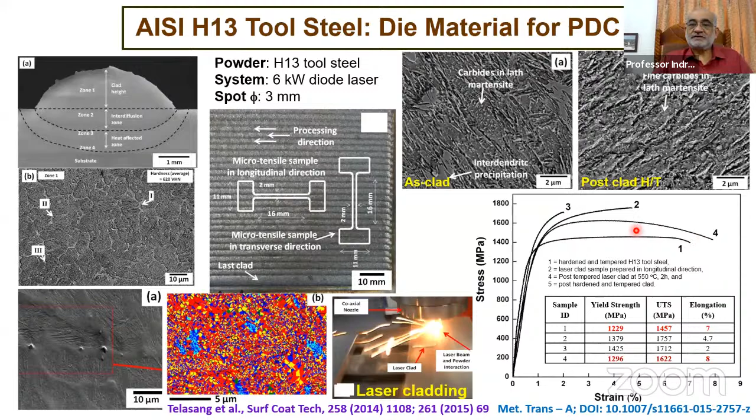Instead, we actually have more volume fraction of martensite than the original component. Why is it so? You are solidifying steel from molten state all the way to room temperature, and during that, because of high hardenability, the steel not only solidifies into austenite but also undergoes austenite to martensitic transformation during the same continuous cooling process. Since the lath size is finer than what could happen in bulk, because it's happening only within 1 or 2 millimeters with very fast self-quenching, the platelet size is much smaller.

As a result, we get not only higher strength but also higher plastic region. So one reason we are interested in additive manufacturing is purely because if you do subtractive, you create so much waste. If you do additive, practically no waste. There is enormous advantage in terms of design flexibility, precision, accuracy, practically very little tooling required, no further machining. This is a fairly green and clean manufacturing process, amenable to almost all kinds of materials. Ceramic is a suspect, not yet very popular, but metal and polymer for sure. It's ideal for high cost, low volume products.

But the most important thing is that an industry which 20 years ago was $1 billion, in 2018 itself was one order of magnitude higher, and now the projection is by 2025 the amount is going to be some 23 or 25 billion dollar market. So there's a huge market and expanding every day.

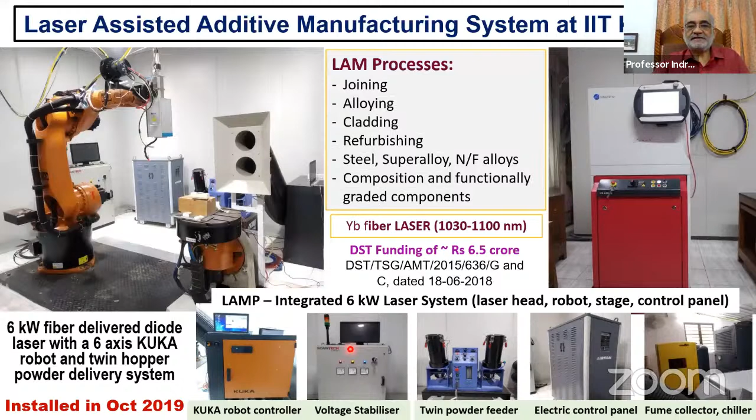Now, the confidence with which I'm speaking today that additive manufacturing, cladding, and eventually remanufacturing are all possible using laser as a tool emanates from the fact that in 2019 we established this laser processing laboratory at IIT Kharagpur: a 6 kilowatt fiber-delivered diode laser with a 6-axis KUKA robo arm and a powder delivery system. In this, we have been able to produce many results covering joining, alloying, cladding, refurbishing, and various other operations. I'm pretty sure a finished component is quite possible, though we don't have that level of competence as yet. But this is a complete laboratory which can do all kinds of material processing, except oxide ceramics, and produce either clads or three-dimensional products and a complete system as well.

We all know that laser is very interesting and attractive to us because of these reasons: coherence, monochromaticity, very low divergence, and most importantly, very high power density at exactly the spot where I want. In other words, we can produce the exact heating and cooling profile, thermal gradient, and solidification velocity, depending on where I place my focus.

This is an extremely fast process because for direct band gap, indirect band gap, or no band gap materials like metals, the excitation of electrons to a higher energy state and falling back to the ground state, while absorbing the incident photon energy and converting it into lattice heat, is possible only within less than a nanosecond, between nanosecond and picosecond timescales. So it's an extremely fast heating and cooling process.

Another advantage is that the heating profile is exponentially decaying, so the heating zone is confined only to the near-surface region, which could be just a few micrometers. Only two process parameters, power density and interaction time, allow you to achieve heating, solid state transformation, melting, vaporization, and in the process carry out all kinds of materials processing imaginable.

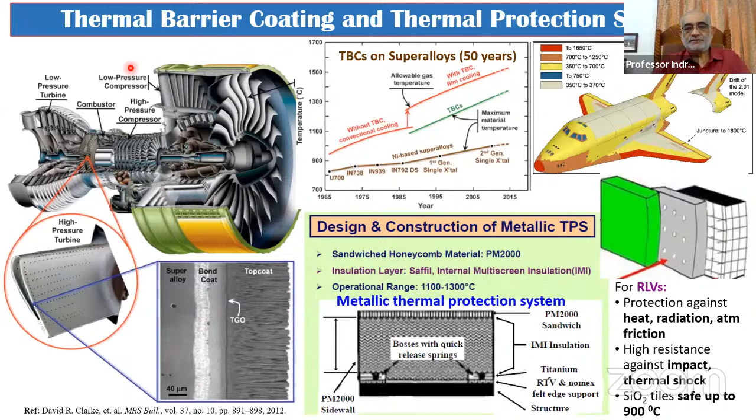Now onto specific examples. Manoj Kumar wanted to develop thermal barrier coatings and oxidation-resistant materials. Here's the first example, decades old, from Jyotsna's work during her PhD.

For the first time we showed that instead of an oxide barrier coating, if we could have silicides, an intermetallic phase much more compatible with the metallic base than oxides, making up 85% of the volume fraction, either as the primary phase or as part of the eutectic, then instead of the easy oxidation process in the base metal, titanium in this case, creating such a barrier layer prevents the counterionic transport of oxide coming from outside and cation going outside, so oxidation is prevented.

As a result, compared to how titanium normally oxidizes, these silicide layers reduce the oxidation rate significantly, even at fairly high temperatures. This is what we showed a long time back.

Subsequently, we repeated this with nimonic alloys and also dispersed borides and silicides in stainless steel, developing such composite structures. Borrowing from that, Manoj wanted to create these thermal barrier coatings.

The initial approach was thermal spray followed by laser melting, and we were able to produce a very nice structurally and functionally graded component, with the top layer being primarily oxide with certain controlled porosity to reduce thermal conductivity.

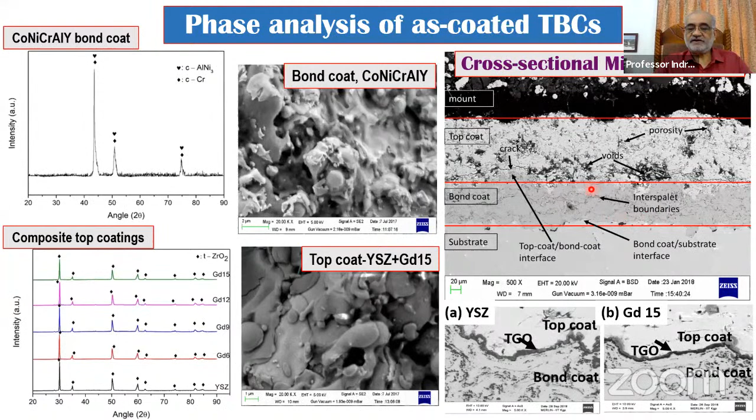But then you need a bond coat and a substrate, so cohesion here is very important, and the top coat has to connect well with the substrate via the bond coat. So you have the possibility of creating 3-4 different layers, and each time you have to switch from vapor deposition to thermal spray and so on. It's a fairly cumbersome process, and the interface is fairly sharp, which is another major disadvantage because spallation can happen.

We also tried developing boride and nitride level coatings, and bulk metallic glass coatings. We thought that would be an ideal universal solution—if you have such a bulk metallic glass, there'd be no grain boundaries, hence no boundary diffusion, and oxidation or corrosion could be significantly reduced. But we realized that even despite a cooling rate of 10^5 Kelvin per second, in that small melting time...

If you have components like boron, carbon, or yttrium on one side and nickel or iron on the other, even in that small melt pool residence time, elements very different in density, melting point, and specific heat have enormous attraction for each other, and they combine to form multiple carbides, borides, and so on. So it's no longer a single phase—the clad is very good and gives wear resistance, but it's not a single-phase product anymore. This is just the metallurgical aspect of it.

What's interesting is that Manoj proved that instead of going for oxides, if you go for silicon, aluminum, or borides, you end up making an interface that is perfectly compatible. You can see some of these columnar grains growing nicely and epitaxially from the base substrate into the very fine structure—this is how it looks at the interface, and this is the alloy zone.

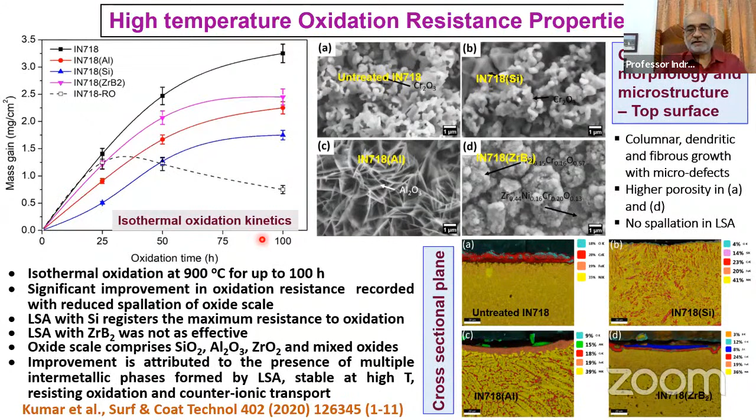So here is an example of what happens if I mix stainless steel with 718 and do a gradation: 100% stainless steel base substrate, 75-25, 50-50, 25-75, 100% Inconel. So I have a stainless steel component and I do compositional gradation, and finally I have only Inconel 718.

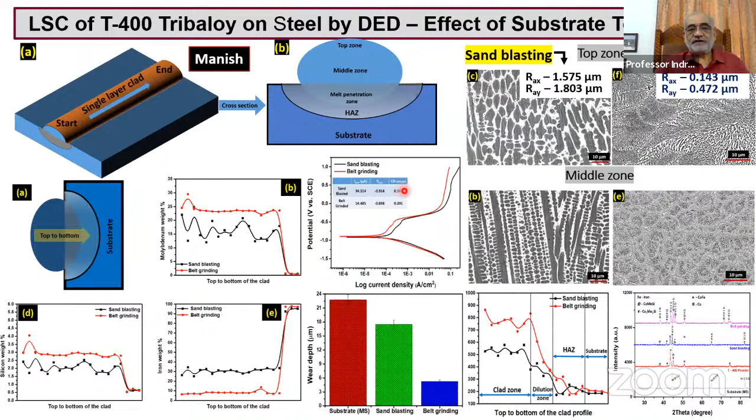As a result, you retain higher hardness, and the phase aggregate also is different. By the way, I forgot to tell you that here the cladding is Tribaloy 400, which is a multi-carbide boride mixture in a martensitic base. They can actually provide very high not only wear resistance but even corrosion resistance, provided you maintain the thickness well. This is from Nikita Mohite.

She is an employee of Hoganas Pune, and she is interested in taking care of these casting rolls and their damages. So her job is to try - this is 4140, the base steel, martensitic steel, low alloy martensitic steel - and she wants to try out with SP616.

These are all trade products of Hoganas. This is very similar to 4140, but Rockit 431 is again a martensitic variety. X402 is possibly a super austenitic variety. So she wants to try cladding and then refurbishing, to an extent that the roll can be reused for a new lease of life. So this is the kind of cross-sectional microstructure.

This is the clad zone. This is the interlayer or melt penetration zone, and this is the base substrate.

A similar approach Mangesh wants to do with these railway wheels. He basically is dealing with two substrates, 4140 martensitic steel and 1070 plain carbon steel, but near eutectoid. In such cases, he is again interested in cladding Rockit 401, which is a multi-carbide martensitic clad material. So this is the clad zone, and this is the melt penetration zone, and this is the base substrate.

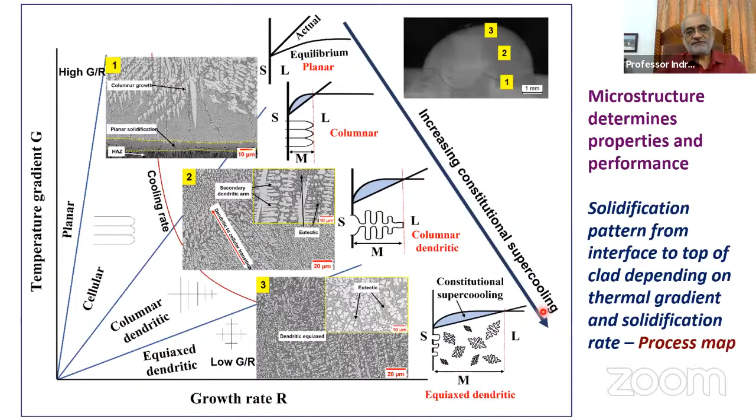Essentially, in case of solidification processing, there are two important aspects: the thermal gradient and the growth rate. With this I can actually create a process map, and from that I can predict under what regime I'll have a very high G by R ratio and hence a planar growth front, and on the other hand what would be the lowest range of G by R ratio so that I can get equiax structures. In the process, this is how I can control the microstructural gradation with increasing or decreasing amount of constitutional supercooling, or the phase separation or solute segregation during the processing itself. I'll skip this part.

When we talk of cladding, it is basically a layer-wise deposition: one layer, second layer, third layer. Additive manufacturing is a droplet integration process, so you go droplet by droplet along X, along Y, then along Z. This is how you build a 3-dimensional structure, creating a full component or device. So remanufacturing, in my opinion, can largely benefit from the established technology and knowledge base available with the cladding and additive manufacturing community, ensuring huge growth potential for this new technology. Remanufacturing is a logical progression in that direction, building on what cladding and additive manufacturing are already able to do.

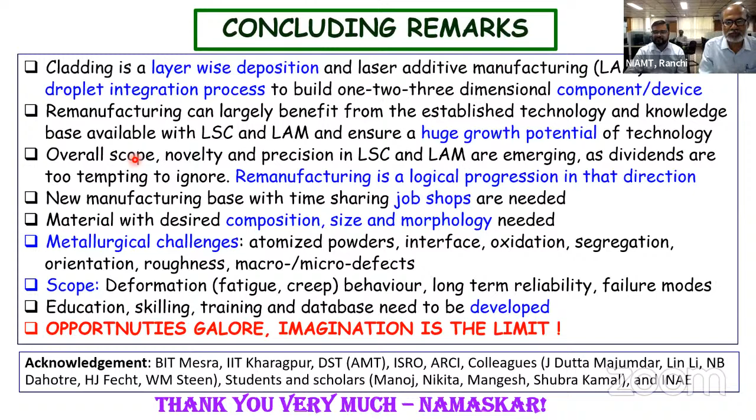...that it is an important variant of manufacturing process in between conventional manufacturing and 3D printing, where we can use a simple code and we can improve the performance even better than the original component by customized development of layer by layer with tailored microstructure and phases. So we are really thankful to you. This definitely sheds some new light on the progress of remanufacturing in the future.

Thank you. Thank you, Partho, and thanks also for making me learn the new subject, though on a Sunday morning. And also my apology to Soumitra for gate crashing and replacing him. So with your permission, Partho, I would like to now exit. Sure, sure, I understand, it is now 11 plus. Right, okay, thank you very much. Thank you, sir.

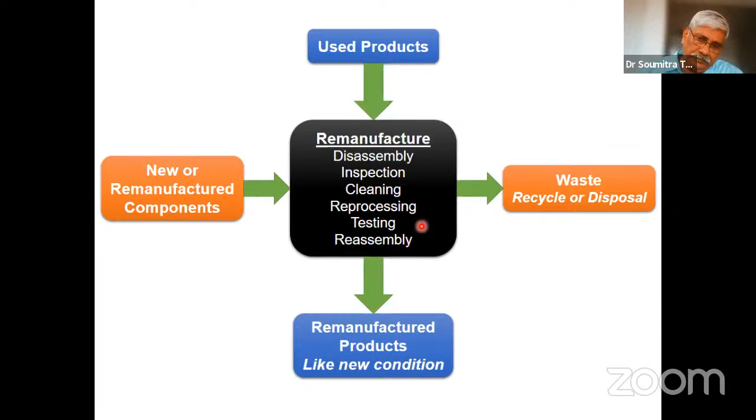I wanted to show that there is a host of skill, expertise, knowledge, and technology available for structural integrity assessment, which can also be used for remanufacturing as we get into that domain and help to lay down an industrial backbone in India. So what is structural integrity assessment?

When I talk about structural integrity assessment, essentially I want to state: if critical structural components—for example, pipelines, boilers, turbines, or any other such engineering components—whose failure is totally unpardonable or must be avoided, when we try to understand its structural integrity status, we essentially have to rely on three types of inputs. Three types of information are required for it.

Firstly, information on the material from which such components or structures are made. This can of course be documented already from the OEM, but sometimes the material degrades when in service, and you have to understand the type of degradation that has taken place in the material.

You must also have the capability to do non-destructive surveillance. This is a very important aspect of structural integrity assessment, because through this you understand the damage and the location of damage happening in the structural component.

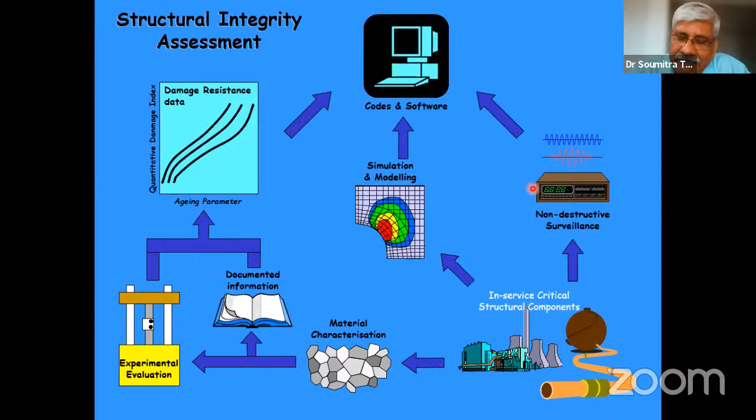Having said that, the proof of the pudding is often in its eating. At times in structural integrity assessment, you have to sacrifice a component or structure, do full-scale testing, and ensure that the integrity assessment you have proclaimed meets your predictions. So this is what structural integrity is all about. It didn't start off as structural integrity assessment—let me give you a bit of history.

In the late 60s, it started as a proposal for assessment of fitness for purpose. It was primarily for welded structures, because welded structures were deemed to contain defects inherently. And it used fracture mechanics principles in order to carry out this fitness for purpose analysis.

Over time, it was found that the same principles could not only be used for welded structures, but for any critical structures, because during the manufacturing stages there can be defects incorporated into any structure, or during the operation or service life, defects can be generated. So you can use the same principles, and it began to be known as engineering critical assessment.

But then, with further developments, damage was not only thought to be cracks or crack-like defects, but any type of damage—maybe creep damage, corrosion damage, or tribological damage. The scope of the assessment broadened, and it was called structural integrity assessment. That is what has been happening through the last maybe 40, 50 years.

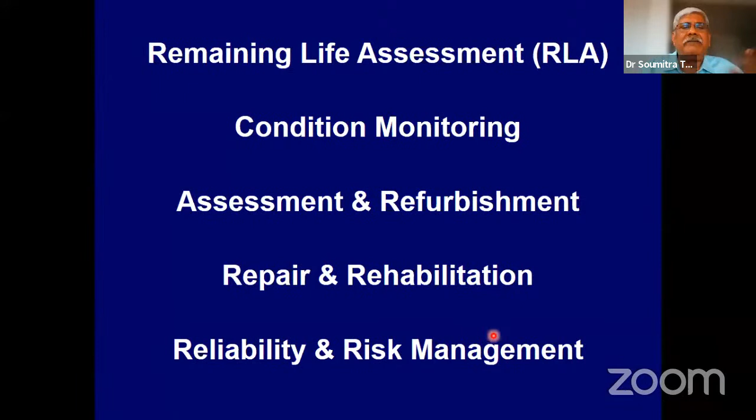There have been a lot of other names in due course, which have been offshoots or specific domains of structural integrity assessment activities—remaining life assessment, condition monitoring, assessment and refurbishment, repair and rehabilitation, reliability and risk management, so on and so forth. These are special domains which are offshoots within the structural integrity framework, and I'm sure some of you may have heard of this at some point or another.

So what we are talking about, as it started with fusion welded structures initially, is the undesired confluence of a defect, a crack-like defect, the stress situation in the component, and the resistance to further failure given by, let's say, the fracture toughness of the material. At the undesired confluence of all these three, we are going to have failure.

So fitness for purpose or engineering critical assessment was more about finding the boundary of this undesired region and making sure you're beyond this, so that you can proclaim that your structure is safe, that your structural integrity is maintained. Over the years, you can now look at any critical structure and not only talk about crack-like defects, but any type of damage.

It can be corrosion damage, creep damage, as I said, I'll come to those later on. As long as you have the damage resistance data for the material—or the degrading or evolving material that you have in service—and as long as you have a good handle or understanding of the operating conditions, you can find the undesirable confluence of all these and make sure your component is beyond that undesirable area, to proclaim that your component is structurally sound.

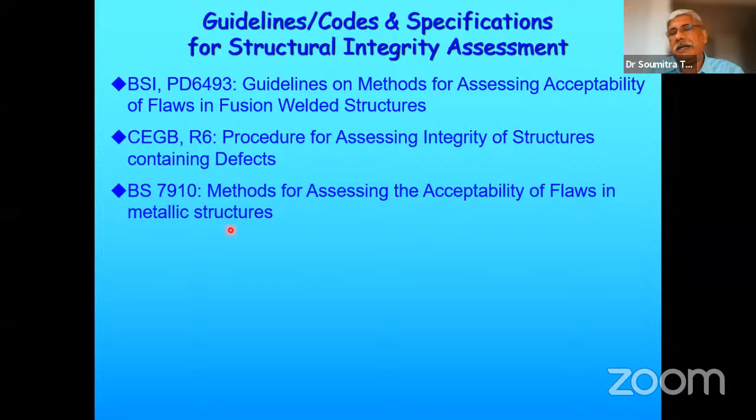Particular mention is the British Standard 7910. They came out with a standard, I think in '99 or 2000, called Method of Assessing the Acceptability of Flaws in Metallic Structures, based on the engineering critical assessment principle.

And also some of the sections and appendices of the ASME Boiler and Pressure Vessel Code, which talks about the procedure for structural integrity, and the code cases, which tell you how to proceed in order to calculate if a structure is safe or not.

There are, of course, military standards in effect in US Air Force for designing aircrafts based on fracture mechanics criteria, and the bridge evaluation manual of the American highway, etc. So all these give you, for different classes of components and different types of damaging conditions, the way you go ahead for doing structural integrity assessment.

So I was talking about structural health monitoring. In this gamut of activities, all of which belong, I think, to structural integrity assessment and its practice, structural health monitoring consists of a shortcut.

And it is this: you rely heavily on sensors for non-destructive surveillance of your critical structures continuously, very often, and rely on modeling. These models are based on huge amounts of data of this type which are already built, the knowledge that is already there.

Or sometimes the model can be just heuristic, based on a huge amount of case studies. And you predict, based on certain norms, the structural health of a component. So this, in short, is what structural health monitoring is.

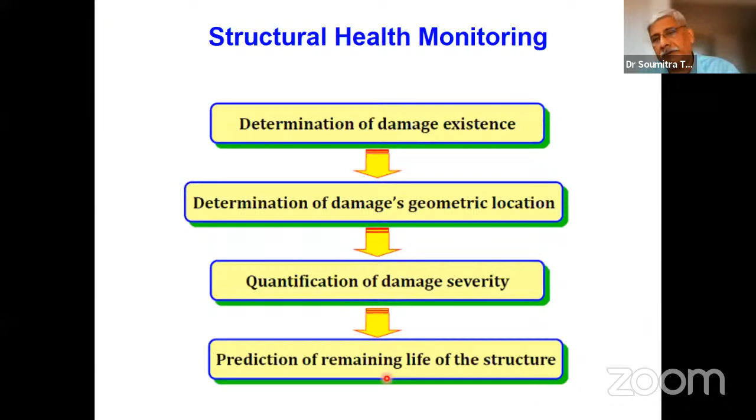It also determines the damage, its location, quantifies the damage, and then predicts, based on models, the remaining life of a structure. Just to give you a simple example, if you have a structure like, let's say, a bridge,

and you can excite it, know the excitation, you get a dynamic response. Knowing the type of structure, you can use analytical or numerical models, and knowing the excitations, you can work out the type of dynamic response.

Structural health monitoring is like an inverse problem. So here you know the excitation, you know the response—can you tell what type of damage has taken place in the structure?

And for that, there are various types of models based on which the health monitoring is done. So there can be models, as I said, based on a lot of data that is already available. It can be analytical models, or it can also be heuristic models.

In recent times, structural health monitoring has shown enormous progress. For example, for the aerospace industry, a steering committee was set up in 2006, and by 2013, within 7 years, first guidelines for structural health monitoring of commercial aircrafts were issued.

And they were obviously useful because by 2016, the US Air Force, for its structural integrity program, the ASIP as it is called, which is very popular, included the structural health monitoring protocols proposed in these guidelines as an in-situ non-destructive inspection method in its manual.

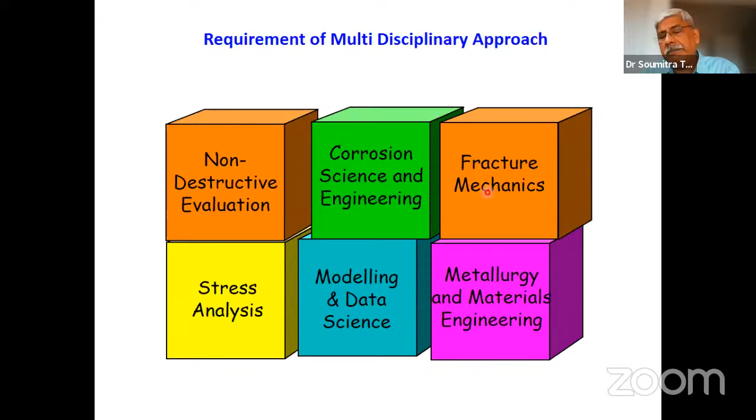The same is true for remanufacturing also in many ways. So I've been talking about damage. What is damage and how is it caused? Where is it located, and how do we quantify it?

We would like to quantify it non-destructively. But for that, we must understand, if necessary destructively, how the damage happens. So let's take the case of metallic components, which I'm more familiar with, or many of us are very familiar with.

You can define a metallic material by its microstructure, by its chemistry, crystal structure, the defects that it contains, the grains, grain boundaries, or the orientations of the grain that you have in the structure, the phases that are present, or some of the inclusions, precipitates that are there in the structure. So all these help us to define a metallic microstructure.

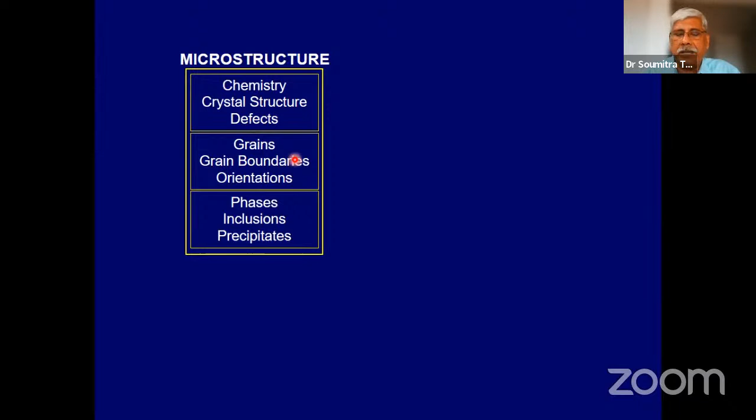Whenever there is an external stimuli on that microstructure leading to damage, let's say whenever there is a stress that is applied on the microstructure, there is a resultant response as a deformation, and it's often can be measured or quantified through the accumulation of strains.

The stress can be very small. It can be, let's say, for a fatigue type of situation, repetitive in nature. There can be environments which influence how the primary damage is established through deformation and accumulation of strain. Let's say temperature, let's say a corrosive environment, all that will influence how this takes place.

But that per se may not be damage. This is only the start of damage, and we can live with that. What happens is when there is a sustained application of stress, maybe cyclic in nature, monotonic in nature, the environment, the other materials that are there in the neighborhood, etc.

This initiation of damage further interacts with the microstructure. The strain interacts with the grains, the grain boundaries, with the inclusions, with the precipitates, and this, in a sustained and cyclic manner, increases the damage. So as the external stimuli is sustained, this will further interact and cyclically be processed within the microstructure and result in damage.

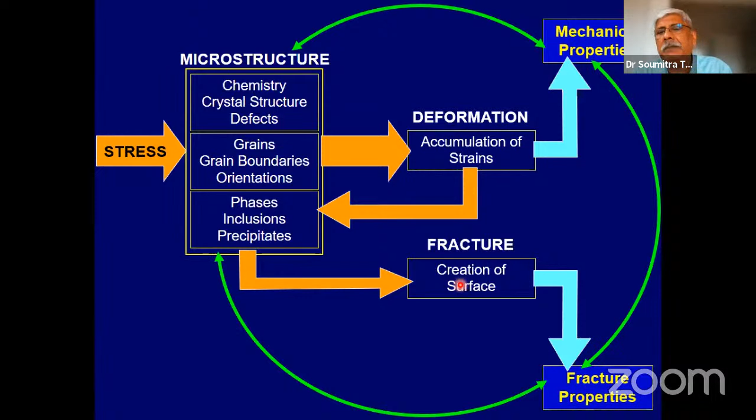Let's look at some of the typical damages that take place. This is not an exhaustive list, this is just what I've made. So in engineering materials, how can these damages occur? Which are the external stimuli that can give rise to some damages?

So the damage can be due to unwarranted load excursions, like impacts or overloads. It can be because of fatigue, when there is cyclic or fluctuating loads, and fatigue damage occurs. It can be at elevated temperatures, creep damage. Of course, at elevated temperature, there can also be microstructural degeneration. And this microstructural degeneration can also be because of corrosion, when there are certain environmental conditions.

Corrosion itself is very important on the surface, and the surface properties gets lost. Oxidation, tribological damage because of wear, abrasion, all these are damaging mechanisms which are particularly prevalent on surfaces, and they have to be quantified, and only then you can tell if a component can be used for remanufacturing or refurbished, repaired, and used for remanufacturing.

In the last lecture, we heard that how some of the surface processing by laser can be used for repairing and refurbishing these components. And there can also be synergistic damage due to operation of more than one damaging mechanism at the same time.

So let me just present a few of the background R&D that we're doing, for example, to non-destructively evaluate fatigue damage. How do you do it? This is all with non-linear ultrasonic. As I said, when there is fatigue damage, essentially what happens is the dislocation configuration in a material changes. It goes into a cell type formation, some amount of dislocation annihilation, subgrain formation, and then subgrain growth. After that, a micro crack is initiated and the crack grows. So if you can quantify damage in these stages, you can say if the fatigue damage is sufficient for us to live with. That is what we have been doing using nonlinear ultrasonic.

The concept of nonlinear ultrasonic is actually very simple. If you use certain frequencies and impose that on a structure, sonic frequencies, let's say 440 and 8000 hertz, then that structure resonates, like a bell resonates. The resonated output from that structure can be captured, received, and it will be the same as the input. But if that structure contains defects or damages, for example if there's a crack in the structure, then the output will have additional harmonics.

So you won't only have 440 and 8000, but higher harmonics of 440 and 8000 of varying amplitudes. And this appearance of harmonics and their amplitude can actually be used to quantify the amount of damage. This is just an analogy, but this can be used for any material.

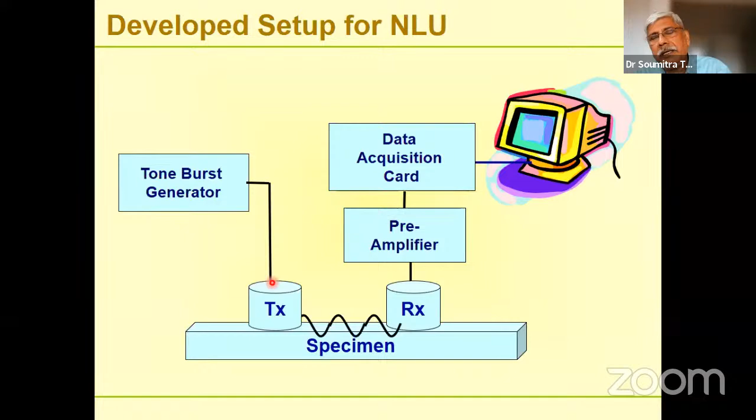So what we have done is we have taken a specimen, damaged it by fatigue, and then tried to monitor the nonlinear ultrasonic response of that specimen after it has been damaged, and looked at the total harmonic distortion in a square or square root form. So again, this is what we have been doing, using a pure sinusoidal acoustic wave of 150 kilohertz initially. And this is the output that you get, the primary signal and the harmonics if there are.

So at least you can tell by a study of the second harmonic from nonlinear ultrasonic how much amount of damage has taken place. So this is the type of correlation that we obtain between the total harmonic distortion and the percentage of fatigue damage, given as a fraction of the fatigue life.

And we find that replicate tests agree very elegantly. And we find that there is a region, if you are within this, perhaps you can say that you have less than 50% damage and perhaps it is safe.

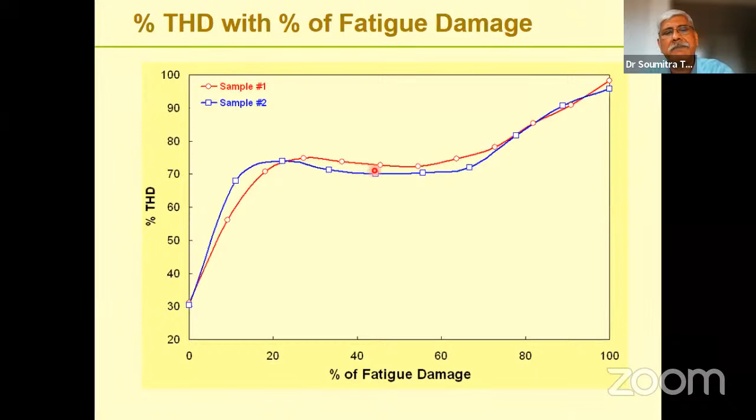We also studied at various levels the dislocation configuration, to understand the type of dislocation configuration that takes place with fatigue damage and how it progresses to ultimately initiate a crack. So that was one of the studies.

Similarly, for creep, we tried to understand if creep damage can be quantified using a non-destructive, nonlinear ultrasonic technique. Creep, as you know, is a very deleterious process for components and structures that are at high temperature, all your boilers, turbines, etc., where the creep rate initially decreases, but the creep damage as a function of strain increases, and then ultimately it leads to failure.

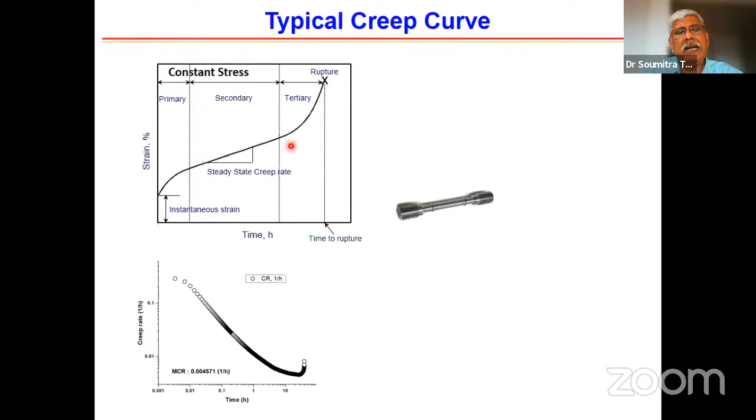There are established procedures of doing a creep test, but the mechanism of creep is primarily through dislocations, by dislocation glide or dislocation creep or diffusion creep, depending upon the stress level and the temperature. And of course, ending with grain boundary activity, sliding, cavity formation, etc., leading ultimately to failure.

To give you very simply, dislocation creep is when dislocations glide and climb across obstacles because of the elevated temperature. And that is what creep gives you, leading to the accumulation of strain and the accumulation of creep damage.

When you have diffusion, this is called Nabarro-Herring creep or Coble creep. Other than the dislocations, which of course participate, there's a lot of diffusion of the atoms that make up the grain, either through the grain body or through the grain boundary. That is the difference between Nabarro-Herring creep and Coble creep.

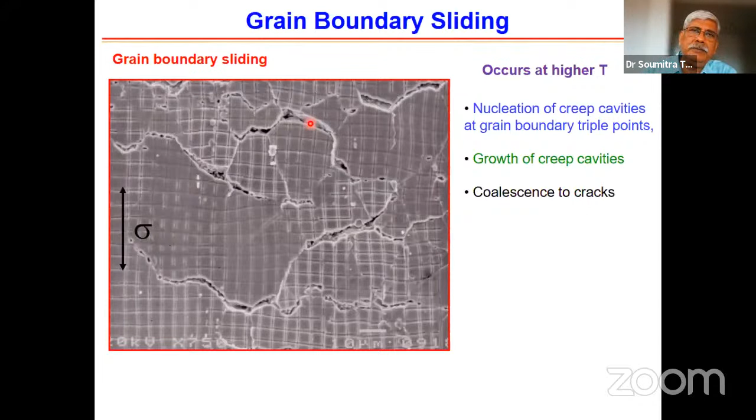And of course, when you reach the ending stages, you have a lot of creep cavities, grain boundary sliding, and crack formation, which ultimately grows and leads to failure. So you have to avoid this obviously. But can you tell at what stage of dislocation or diffusion you are, non-destructively, in order to quantify the damage?

And unless this progresses to a high damage level, the failure does not take place. So can you quantify what you have? But quantification separately in each of these mechanisms is impossible, because concomitant with creep, often you have microstructural degradation at high temperature. So we again use non-destructive, non-linear ultrasonic techniques, and tried to look at the microstructure.

We looked at a standard 9 chrome 1 moly steel, which are used in boilers. And as it goes through creep, you can make out that there is a change in the structure, but it is very difficult to quantify.

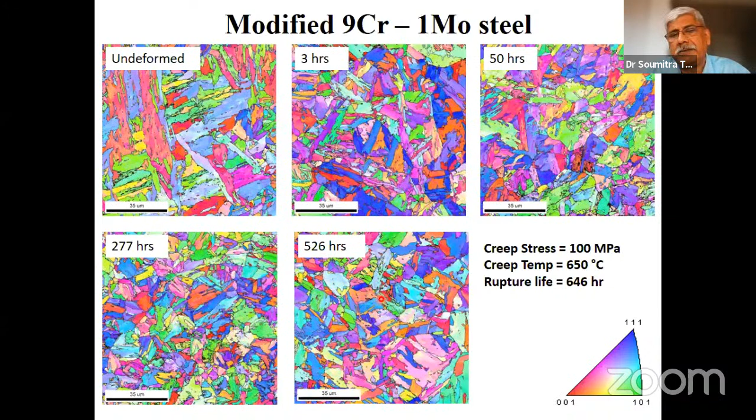This was creep tested at 100 MPa at 650 degrees centigrade, which is typical for this type of material, maybe at higher stress levels. But when you look at the type of dislocation substructure that is there through what is known as kernel average misorientation, because these dislocation substructures within a grain cause slight misorientations from one part of the grain to the next, and they can be revealed through electron backscatter diffraction studies to give you kernel average misorientation. When you quantify this, you find there is a progression. It may not be apparent to the eye, but I'll show you in a graph that there is a change.

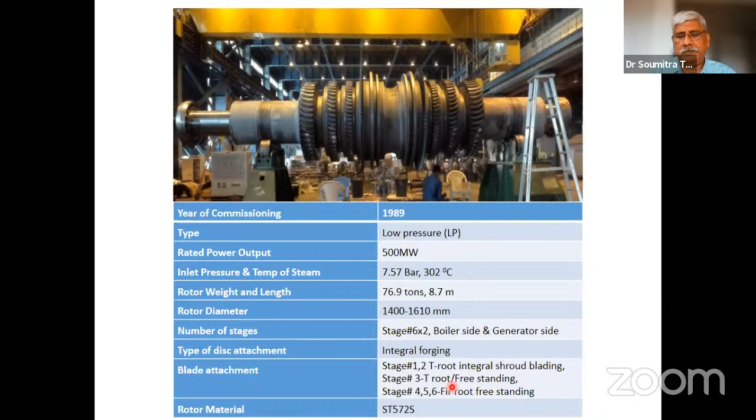This rotor had worked for about 1 lakh plus hours with over 100 startups and shutdowns. It was felt that a lot of life was still left in it, since a rotor of this type can live for much longer. But because of this defect, what to do? The problem was that the defect was in the disc, which is part of the integral forging of the rotor. These discs, onto which the blades are fixed, are integral to the rotor, and the defect was in the disc at this stage of the rotor forging.

So the question was how to repair them. It's of course very standard—you have to remove the blades, etc. In the meantime, it had to be transported about 1,500 kilometers to the place where it was to be repaired, again by very renowned people. And we were checking on how this was getting done and if it was done correctly.

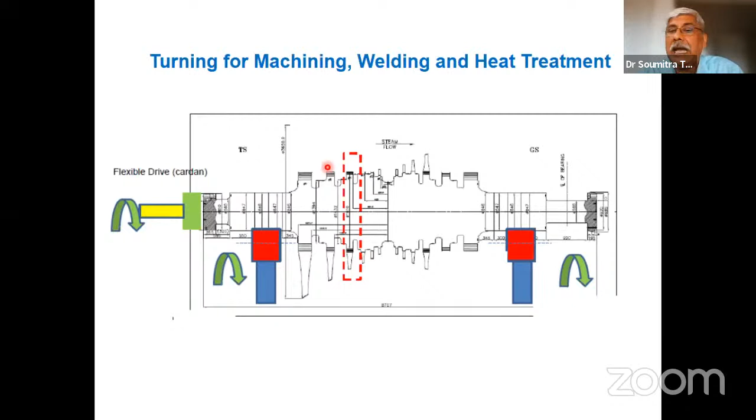So this had to be turned, of course, for machining that part of the disc, and then relaying metal over there through welding, submerged arc welding, doing a post-weld heat treatment, making sure that the quality of the weld was appropriate, the material that was weld-laid was up to the mark, it had the properties that were required, and there were no defects. So that was our part.

So essentially part of the disc had to be machined off and relayed with weld metal, submerged arc welding. This was the welding wire. It had to be preheated, and think of such a big component which had to be preheated, and then post-weld heat treated afterwards. During post-weld heat treatment, these are the parameters: it had to be heat treated to 580 degrees centigrade, but making sure that the temperature of nearby regions doesn't go much beyond 400 or even 300.

So there had to be a lot of insulation, a lot of local heating, a lot of monitoring of the temperature profiles using thermocouples when the post-weld heat treatment was going on. And there had to be a lot of non-destructive evaluation, testing and evaluation, to make sure no defects are generated. So if you look at the repair steps, there's a large number.

Of particular importance is removal of the cracked area and doing a root cause analysis of the failure. Why did the cracking at all take place? So that you know there was no inherent, large-scale defect in the microstructure of the rotor, so that another failure does not take place in another place in the days to come, after you have repaired and refurbished and put it back into operation.

Then there had to be a weld mock-up before you could actually do the welding. These mock-ups had to be microstructurally investigated, and mechanical properties had to be determined in order to give the go-ahead that yes, you can go ahead with the particular steps of welding that was decided upon. And this was again upon us to decide and give the go-ahead.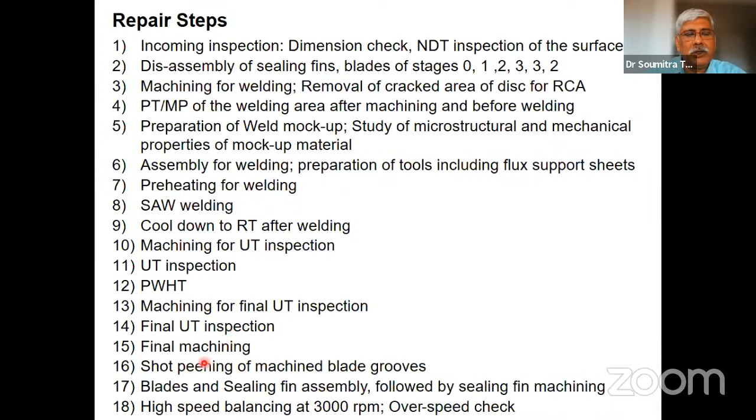So after all that, the blades assembled were again put together, sealed, high-speed balancing was done, overspeed checking was done, and this rotor was taken back by the owner for reuse, and it has been used again. So this was repair and refurbishment. And I think it's not very different from what we are talking about in remanufacturing.

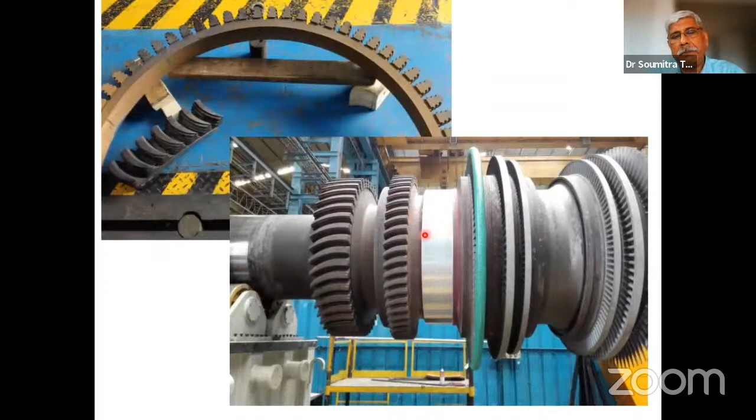These are some of the photographs that we have. The rotor, after the defective disc was parted from it and removed. Here is the defective disc which was parted, and root cause analysis was done to find out the cause for failure. Machining prior to welding, after which some amount of ultrasonic testing had to be done.

This is after the welding, the final machining, when some defect was found and a local region had to be taken out and rewelded again, not to our liking, but nothing could be done. The post-weld heat treatment was done after the welding.

This is the defect that was found in the existing fir tree in the disc, where the fir tree root for blade attachment is located. So we analyzed that crack and where it came from. These type of defects could be ultrasonically

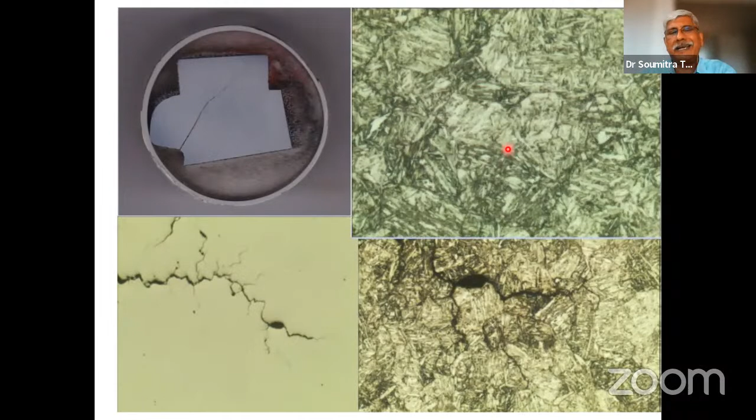identified and located through these NDT techniques, ultrasonic techniques, to which I'll come later, including the sectoral scanning technique using phased array techniques. So we looked at the crack, the microstructure of the welded material after post-weld heat treatment to make sure it is accepted. So these were some of the work that was carried out.

If you look at non-destructive testing and evaluation, I don't like calling it non-destructive testing because there's a lot of evaluation in fact. There are various methods, and this is not an exhaustive list, but various methods of non-destructively probing a component or structure are available with us. And with that, we can do many things.

We can detect a flaw and evaluate if it is acceptable. We can do leak detection, defect and damage location. We can do dimensional measurement. But for all these, some amount of standard equipment is available and quite popular.

But the developments taking place will actually help you, and some of it is coming into the market, some of it that we are developing at NML or have already developed, will help you characterize the microstructure of the degradation or deterioration of microstructure within.

It can give you the mechanical and physical properties of the material, actually giving quantitative data, quantitative measurements. It can tell you about the stress-strain response, dynamic response of the material. These are very important for design, for redesign if you want, and for elastic modeling in all freedoms of movement.

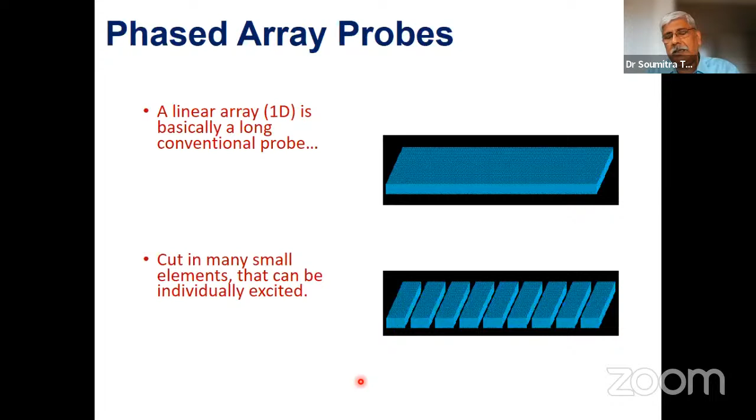You can use longitudinal waves, shear transverse waves, or combined waves to probe a material. You have these phased array probes, which are essentially a piezoelectric probe that has been cut into small bits, which can be triggered and used for receiving in different phases, different phasal configurations electronically.

And through that, you can actually focus an ultrasonic beam and look at a particular area. You can also have a very large depth of focus and adjust each pulse to check various locations. You can also steer that focused beam to look at a sector, to find out where a defect is and what is the extent of damage.

And it's not only defects - you can look at microstructural damage, you can look at the type of fatigue damage or creep damage that has taken place through these developments in ultrasonics. And these are all available in the market, these sort of beam steering and beam focusing devices.

You only have to use your software at the back, or your concept at the back end, in order to use, let's say, nonlinear techniques. So I'll end here. I think I've taken up quite a bit of time, 50 minutes.

So I'm talking about damage and how it is incorporated - it has to be remembered - and how to non-destructively identify that damage and use it for making a decision on whether it is safe or unsafe, whether it has to be discarded or can be reused in terms of remanufacturing. That is what we are trying to do.

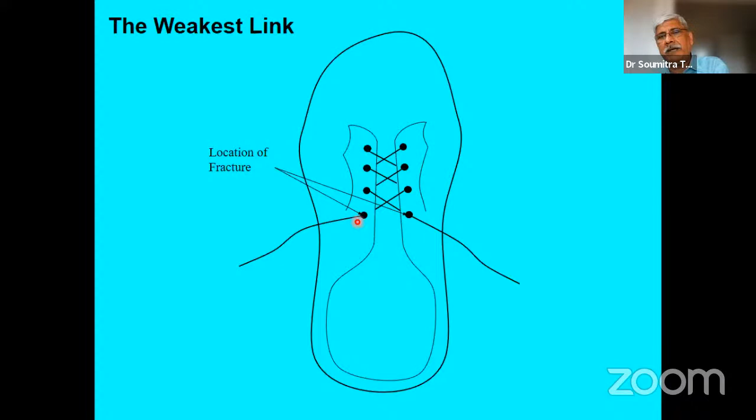Using non-destructive techniques and principles of structural integrity, you can always locate which is the weakest link and monitor that progressively and closely, in order to see if it is acceptable to use it, if it has to be discarded, if it is safe to continue to use it, if it can be used for remanufacturing, if it is structurally safe.

It's all about the tools and techniques you have to counter the wear out failures, to understand this total failure scenario, so that you can pronounce if a component or structure is safe from the principles of structural integrity assessment, or if a component is reusable from a remanufacturing paradigm.

So that's what I wanted to say. The demand on engineering structures is actually very fierce. You have high efficiency and increasing costs competing with each other. So we are going to continuously higher stress levels, higher pressures, higher temperatures, higher speeds, and more severe environments.

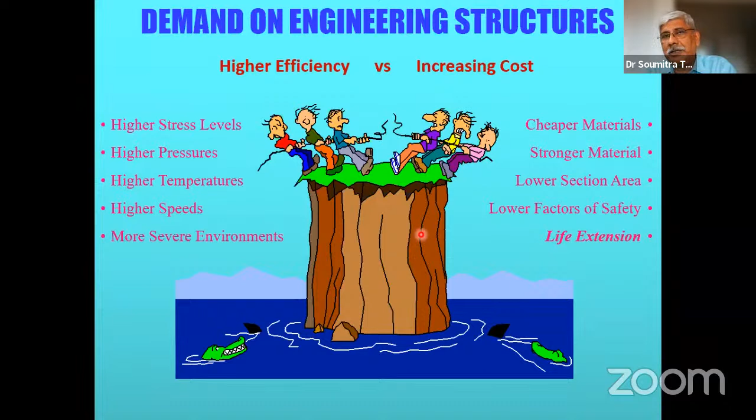At the same time, we have to look for cheaper materials. We have to make the material stronger, therefore we have to lower the section area, lower the factors of safety, and extend lives from the point of view of some of the sustainable development goals we were talking about. So this is a tug of war, and we have to balance it very carefully.

The failure often leads to very grave consequences. So this is what I wanted to convey. I hope I have been able to make my point. Thank you, and I'll be happy to respond to any clarifications.

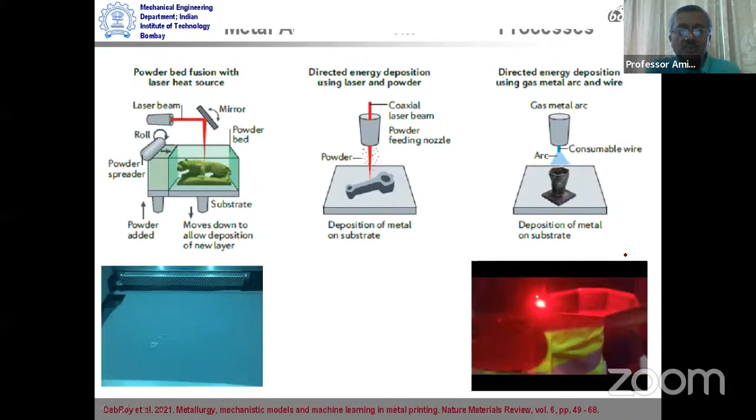As the title starts with metal additive manufacturing, I would like to give a short brief on the processes we talk about. As we know, powder bed fusion with a laser heat source, directed energy deposition using a laser and powder where the powder comes through the laser beam, and directed energy deposition using a gas metal arc and a filler wire as the feedstock material are the three major additive manufacturing processes we see these days for metallic materials and alloys.

Broadly, we classify this particular process as a powder bed process, where a bed of powder alloy is laid one layer at a time, and the laser melts and solidifies selected areas to finally create a three-dimensional part, as we see here.

In contrast, these two are kinds of directed energy deposition processes. I really don't know why the name came about like this—perhaps the fact that the heat source and feedstock material both come together and are directed to a local area to create a three-dimensional near-net shape layer is the genesis of the name 'directed energy deposition' for this group of processes.

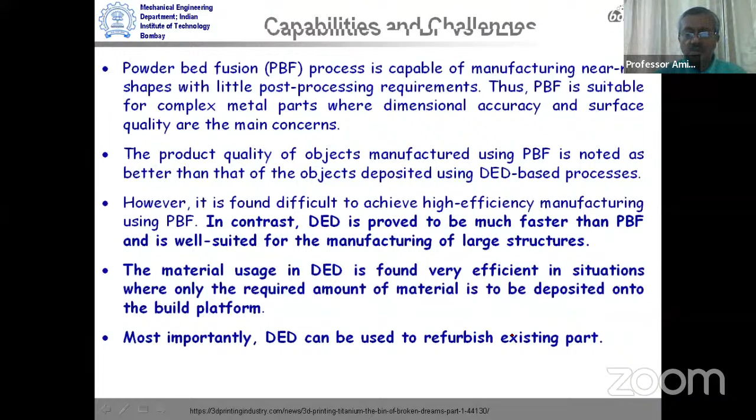So considering these two facts, that it can rebuild large structures faster and it is also efficient in use of materials, DED processes are kind of found much more appealing for refurbishing of existing parts. It's not really very surprising.

That's where it started. Now let us go to remanufacturing or recreation. What is the kind of conceptual stage?

We see that if we go for regular manufacturing, we use material, then we do some process and we get the final product. We use it and then it gets wear and tear in its service, and then at some point there is a decision whether this will go to incineration or we should go for remanufacturing to save energy, reduce waste, and minimize environmental pollution. So this is a decision. Often it may not be at the hands of engineers but at the management level, but imagine this is where the remanufacturing starts. So this is kind of the life cycle of a part for manufacturing.

Now, what's the value today? If we look at a typical scale in 2017, this is from a review paper in 2017. If we see the output values of remanufacturing, in Japan it's something around this, in UK it's this, in USA it's a much higher value. So it's not that remanufacturing is not happening, and these values are basically, as I said, from 2017, so it's already happening.

And what are the processes? If you look at DED-based processes, they are doing almost 86% of the remanufacturing jobs in comparison to powder bed process or fused deposition modeling process, so they are having a much lower share.

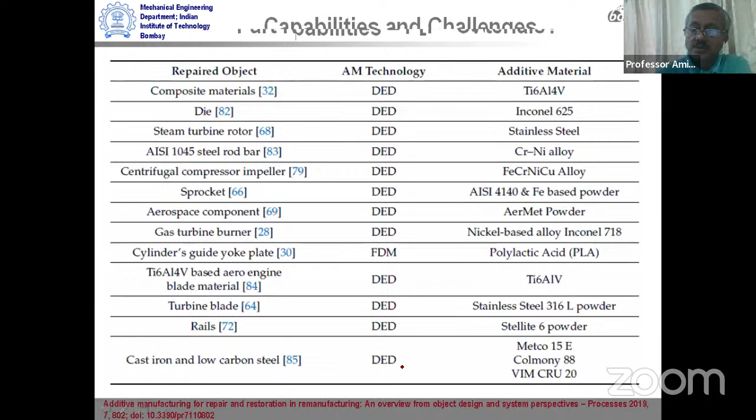So it's almost clear that whether we use a laser or an arc welding based process, DED, directed energy deposition, if at all being used for remanufacturing, this group of process will be supreme, or more or less dominant, for remanufacturing.

And what are the challenges? One of the most important, out of many, is geometry complexity. Where do we get stuck? We can decide to go for 3D printing or DED-based process for remanufacturing, but in most cases the complexity is geometric - the shape of the part that needs to be reconstructed for reclamation.

Consider a curved surface, overlaying the surface of a marine crankshaft, a hollow cylinder of a gas turbine burner with varying thickness between 7.2 to 7.3, meaning a very close tolerance. Overlay wearing on the surface of a crankshaft, again a circular cross-section. So if we look at it, the geometric complexity is tremendous.

Again, not surprising why DED-based processes are found more suitable for remanufacturing of parts if we consider the additive manufacturing group for remanufacturing. Now, when I started studying what remanufacturing is and how much is its penetration,

I casually looked at Web of Science, one of the most important databases, as you know. When I searched these topics, we see not many publications available in open literature. Why are the numbers so small? When we know that in the last 5 or 6 years, additive manufacturing has perhaps crossed 50,000 papers published, so why not for remanufacturing?

What were the situations observed? It was seen that with certain amounts of current, voltage, and heat input, they reported much lower porosities. When the heat input is increased, the porosities are much more. Not only this, further structural and property analysis was also done.

Remember, the part was of gray cast iron, which is not very easy to handle, especially when you're talking of a repairing process that involves localized melting and solidification. So people have taken due care, using a very high nickel content filler wire to address these issues. After some trial and error, they must have finalized the actual process.

This part was initially machined, then with wire arc additive manufacturing it was rebuilt, post-processed, and finally remanufactured and completely put back in use, as reported in open literature.

So after doing all the basic tests, property and structural characterizations, here's a typical damaged turbine blade of SS316L. Again, this is an ideal component for doing refabrication or repair. Now here comes the difficulty.

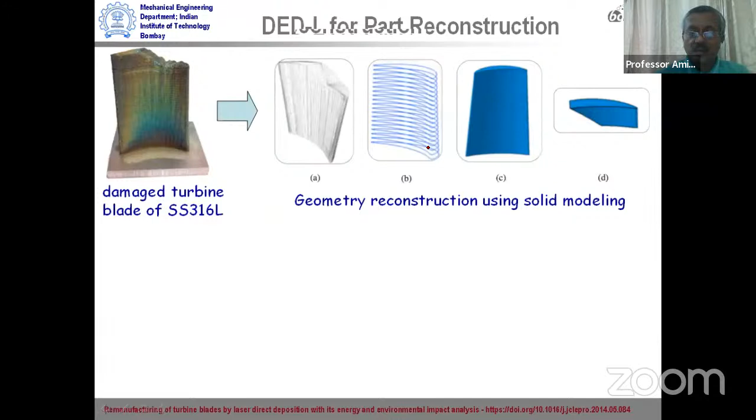But once this can be done, the part is repaired, for example, using a laser engineered net shaping type of process, which is a DED process, laser-based DED. As you can see here, the parts could be repaired quite well, although there are certain issues that require more process optimization.

But what is more important here is that people have done some calculations and seen that it could be brought into shape with some 18 layers of deposition, resulting in a total 45% carbon footprint improvement and 36% energy saving over replacement with a new blade.

I think in today's world these are huge savings, and this is also very economical. So the fact I want to share with you is that this has great potential, and we need to look not only at the process but also at the geometry reconstruction, which requires tremendous attention because it is very difficult to start.

Think of a defective gear, for example, where damage has happened to one of the teeth. Once again, the steps remain the same.

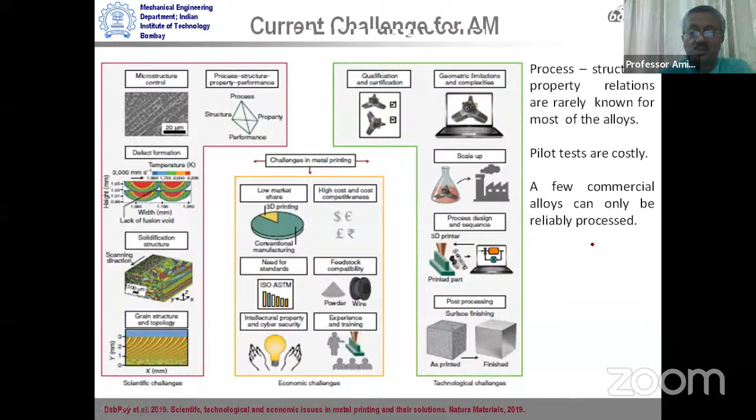As of date, even if we talk of simple additive manufacturing processes, we know that only a few commercial alloys are reliably processed, not many. So this problem would remain consistent for remanufacturing if we want to consider additive manufacturing as a potential route for remanufacturing of worn out parts.

This is a very favorite slide of mine because I'm from manufacturing. This is an area which is always a problem for any new manufacturing process: starting from demonstration and conceptual stage, can we scale this up? It's a huge difference. We have a lot of processes now well established which can make these thin walls, even small parts of thin walls. But to scale it up, to repair a localized region, is a mammoth task.

To do it requires a huge amount of collaborative effort, a lot of study at a lot of places. And not only trial and error studies like in regular processes, we also require very fast, responsive and reliable real-time monitoring techniques to know whether the process is happening correctly, because the processes happen very fast. So we need to monitor them.

If we look at one of the traditional routes that we have found very useful in normal manufacturing, casting, forming, machining, simple welding, cladding, whatever we talk about, we have seen that some kind of calculations or quantitative methods have always helped to get a better understanding of the process and optimize it. Can we do this here also? This is a huge challenge when we start with additive manufacturing.

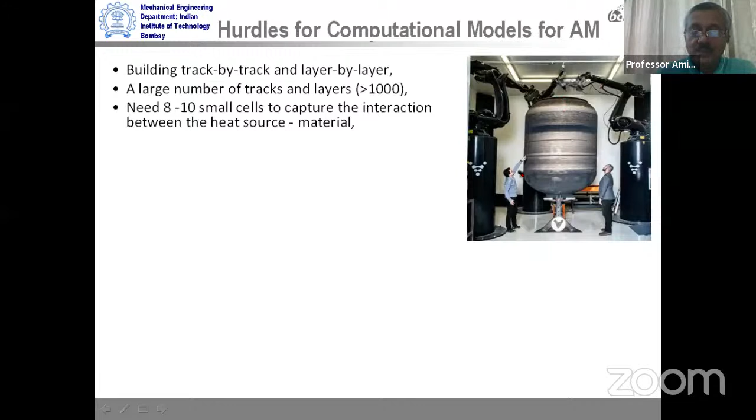This picture shows the scale of the part compared to normal welding or forming. We are not talking of two simple plates welded side by side. We are talking of this kind of structure being built, or maybe part of it when repairing. The scale is huge. So modeling this track by track, layer by layer...

That means we are talking of something like a 1 millimeter cube. If we want to model and see what is going to happen there, we are talking of 1 million cubic cells of 10 micron each, and that might be for 1 million time steps or more, because that would be the size of localized melting and solidification in an additive manufacturing process. These computational challenges have not been faced earlier, even considering laser beam welding.

There are many techniques coming up to help additive manufacturing groups of processes, and I believe they would also help in grasping better ideas for remanufacturing by additive manufacturing processes, like microscale models, mesoscale models, multi-scale modeling approaches. Some of these I can share with you, for example, like this.

Models have been developed for getting an idea of what would be the shape of the bead in a typical layer by layer structure, a thin layer wall structure, in laser engineered net shaping process, which is a directed energy deposition process. We see that this kind of model is able to predict what is going to be the shape of the part, and it shows that if we can do it better, perhaps we get a more uniform wall thickness.

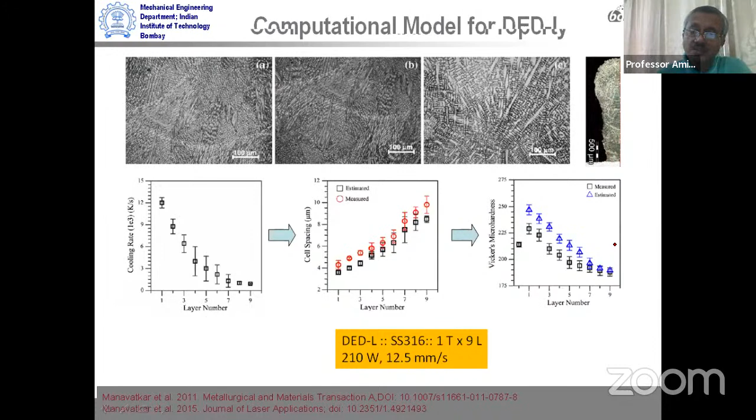If these models can be verified with experimental results, they can predict things more reliably, and this can reduce a lot of trial and error experimental studies. So this will help us not only in laser engineered net shaping process, but even if we think of gas metal arc based directed energy deposition process like this one.

In this case also, these models are now developed and well established. For example, to create layers by this kind of GMA process, whether it is one track one layer or three track one layer, these models can actually predict the shape of the profile of the deposit and how the temperature profile, melt pool, or track profile will be asymmetric as we move from one track to the neighboring tracks. This is intuitive, but we don't know how much it would be unless we do trial and error studies. So one alternative is this, where we can reduce the number of trial and error studies much further.

These models can also be used to compute stresses, an important factor to see whether the final build will have residual stresses. We can predict longitudinal stresses and transverse stresses across the layers, and this provides us plenty of information.

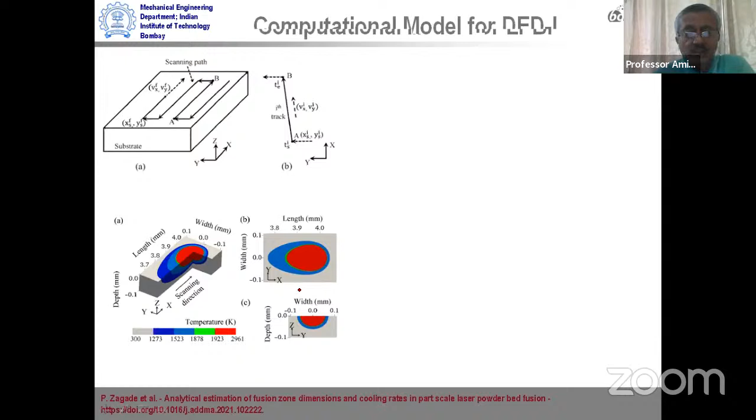These models not only can be done numerically with a lot of computational infrastructure, but can also be done through analytical models. These models are also being developed to compute porosities and so on.

As you can see here, these analytical models for typically the PBF process, powder bed process, can predict the kind of porosity at different conditions. They can also predict the pool dimensions, so in effect giving us the track dimensions, whether unidirectional or bidirectional kind of scanning.

In a subsequent work, these people also did a thermal model to see what the track dimensions should be, by which they reduced trial and error experiments nearly by half, as they reported. They were also able to figure out the expected stresses with the best possible scanning strategy.

In a way, these models are providing huge support, not only for conventional manufacturing and for understanding basic additive manufacturing processes, but now they are also helping additive manufacturing processes move toward repairing of parts.

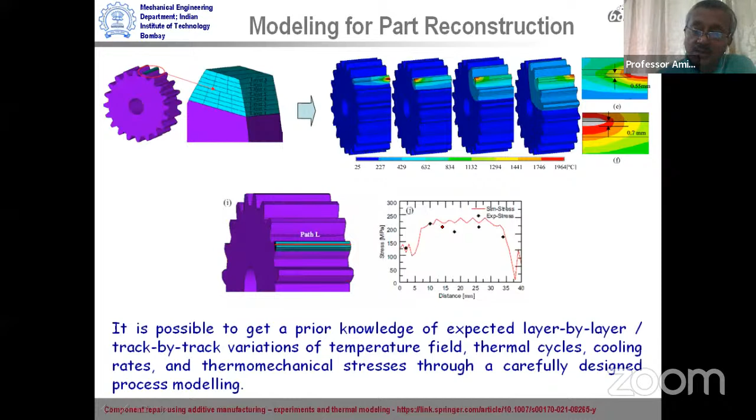This is a reason I told you why things are not going as far as normal additive manufacturing. Now, with models coming to the rescue of building or understanding the processes, I believe these additive manufacturing processes will be much more available for remanufacturing or repairing of parts.

As regards monitoring, let's do a change of gear. So if we talk of monitoring, what can we do? For a typical GMA process that we use for this kind of directed energy deposition process...

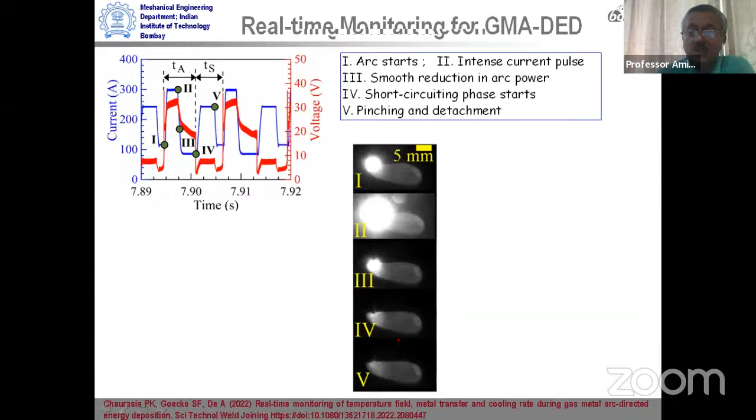Typically, in a unidirectional scanning, it goes on in this manner. In a bidirectional scanning, as it deposits from right to left, we see a much more uniform melt pool. This is obvious because in a unidirectional scanning strategy, there will be a huge amount of build asymmetry due to asymmetric distribution of heat. In contrast, bidirectional scanning gives an even distribution of heat through the length of the tracks, making it a much easier and more uniform deposition.

And how do we get it? This is how we do it. This is how we did it. Here it comes... okay, it's not coming. You can see it later.

Not only from the side, we can also see the deposition from the top in real time, and it shows us the temperature field. As it moves on, we can look through a camera at how the thermal profile appears at the top, which gives us an idea of what the melt pool will be from the top.

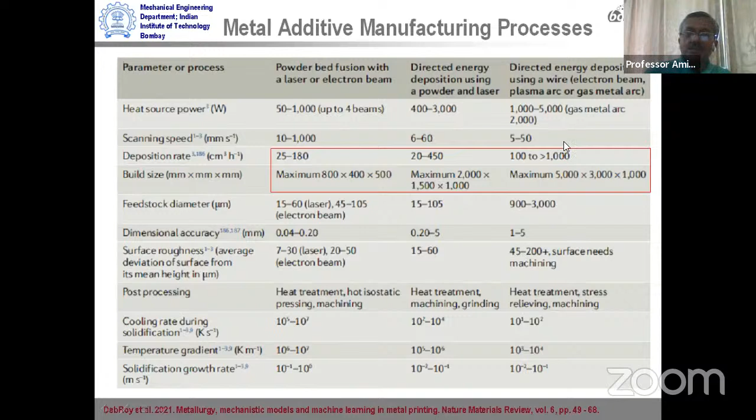Good morning, Professor Nandita Gupta. Good morning, sir. I am a professor at NIAMT.

Sir, I have a question. In remanufacturing and repair, uncertainty and complexity are the main challenges. So how does what you have covered here correlate with the uncertainty and complexity that comes in, along with delays, monetary investments, and the life achieved later being influenced by it? I would like to answer this based on this particular component.

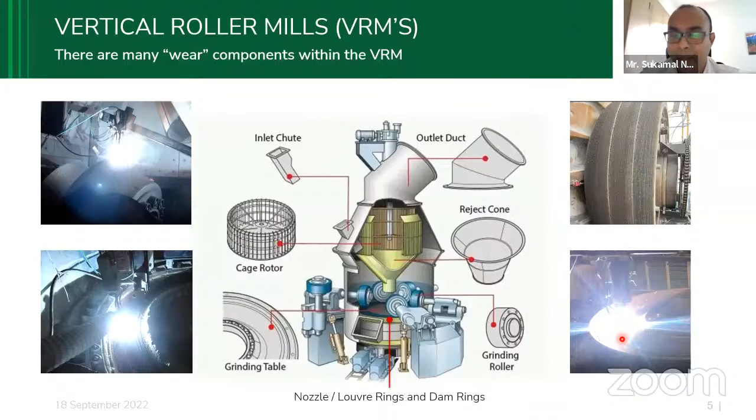So these are some pictures where you can see that basically in the industry it's a common practice to do the repair and rebuilding. Like this is basically cage rotor, this is basically the outlet duct and reject cone. I'll show you in detail some of this.

I try to make this presentation more pictorial so that it can be easily understandable.

So here it is a table. What does this table do? Basically, if you see this picture, here is the table stage. These rollers are giant rollers which continuously grind, roll, and grind the raw materials and make it fine. So these are the rollers, and this is basically the table.

So you can understand when you put the raw materials during fabrication of cement, it causes a huge effect of erosion and impact. So these tables get very easily eroded.

Each component is very expensive, so it is not possible that every time we can buy a new component. So what is the normal industry practice? We rebuild it to make it more usable for both the rollers as well as the tables.

So here is a very good example, you can probably visualize how big the roller could be. This is one of the rollers. One roller could be like 15 to 20 feet in height. So this is basically how we do the roller repairs.

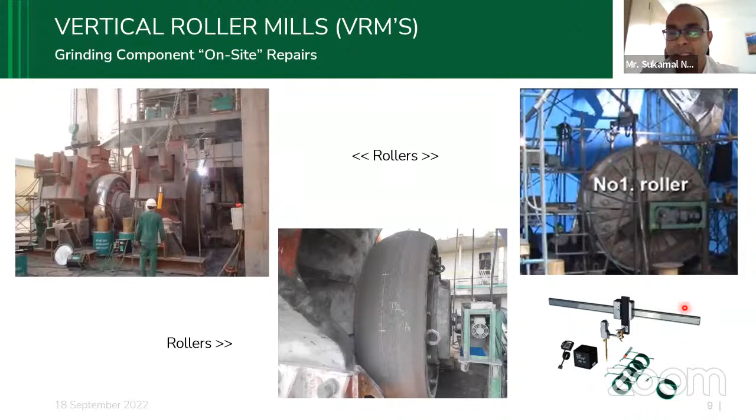So this is basically how it's done. The previous one was done in situ, which was on site, and the next slide is basically in workshop conditions. So we put it here, then we feed the machines, and it automatically gets repaired with different types of machine components.

So this is quite interesting, and this specifically I have taken from our UK operations. I think we all know that during COVID-19, that was one of the toughest challenges we had, because most countries' borders were locked, and forging suppliers from India or China were unable to supply forgings to USA and UK. So this became an interesting question, like to be or not to be, that is the question. So it became: to scrap or not to scrap. That was the biggest question during COVID.

So we had one of the customers who actually invited us, and these are the components which were lying in the scrap yard. You can see it was badly damaged during COVID, almost eaten up. They requested us to visit their workshop, explaining that because of COVID they were unable to source any raw materials and could not stop their production. So could we help them?

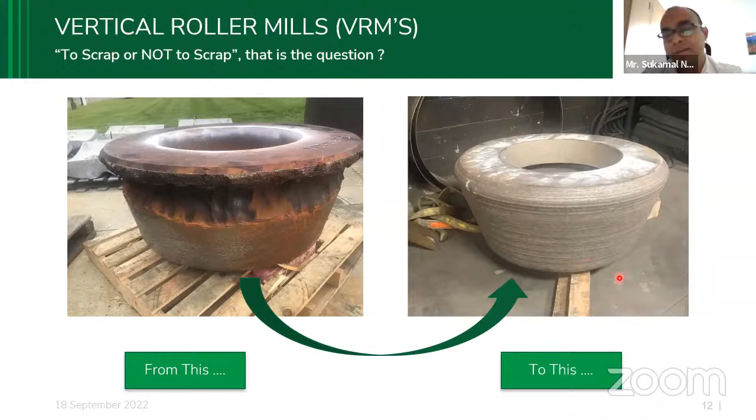Okay, so how we basically select this is not a straightforward thing. What we basically do is like a doctor. For example, if we have a stomach ache, that could be due to many reasons, so the doctor basically diagnoses properly. We are basically like a material doctor, so we try to understand the customer's requirements and needs. Depending on there being several solutions to one problem, and depending on the hardness level or how long they want to extend their life, we recommend different types of solutions.

So these are basically the things we focus on, and here's how we do it. We have abrasion, impact, metal abrasion, service temperature, and corrosion. These are the 5 factors we take note of, and depending on the application, we grade accordingly and then recommend the most appropriate solution.

Okay, so this is another interesting solution. You can see these low rollers don't get eroded uniformly. This is the area where it gets the actual friction with the bed, and this area gets much more eroded. So what we do is put a roll tire casting on the inside. Then we put another layer at this particular location, where there isn't that much wear found, so we use mill 100 type to reduce wear in that area. But this is the area where the maximum amount of wearing happens, so naturally we have to protect that area more. So we use a high carbide type of solution so it can really resist the high wearing areas.

So here we did a little bit of experimenting with the products, where depending on the customer requirement, amount of life needed, and the tonnage of grinding operations, it's shown here. So this is how it basically looks - this is a real case study. Before we applied this MillCarb hard facing, it looked like this profile, and after we applied it, it looks like this.

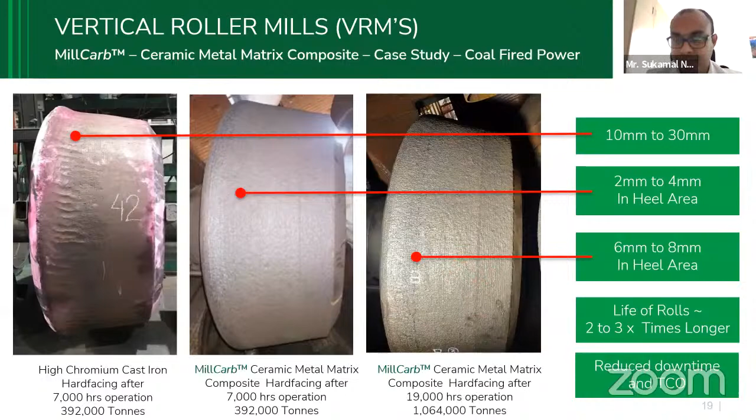So this is exactly the thing - these are rollers which were all put in scrap, and we actually took them back, rebuilt them, and put them back into service.

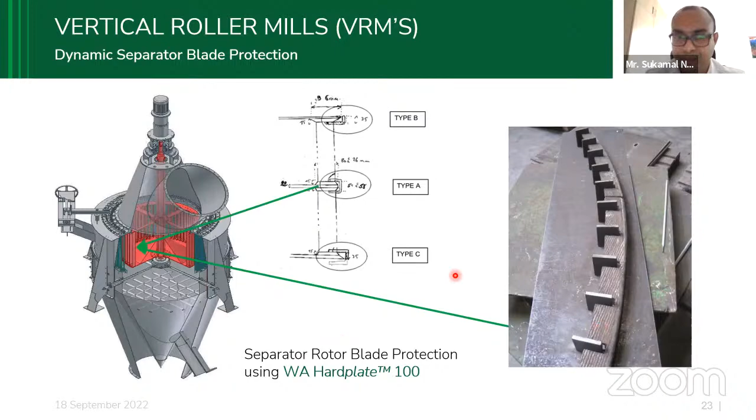So these are all basically hard plates. It enhances the life of these plates. It's a similar thing, called separator cone. Separator cones, because of the very high abrasion, get eroded. So what we do, inside and outside, we use a lot of hard facing to protect or enhance the life of these components.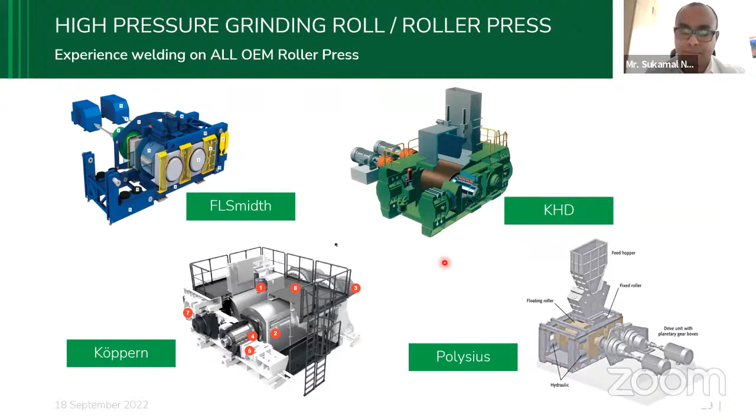Next comes the high pressure grinding rolls. There are several designs as well, like FLSmidth, KHD, Köppern. In this roller press, it also goes under tremendous erosion and impact. This is quite an interesting thing.

You can see here that even when we do a lot of hard facing, because of these hard components, sometimes it gets impressed. Once it gets impressed, it basically reduces the life of the component. So what we try to use is a special type of complex carbides in the industry, so that we don't find any kind of cracking, no hard face spalling.

This is basically hard face spalling, no decrease in mill efficiency, and no need for unscheduled repair. But these are the two most critical issues in the industry. If there is any kind of unscheduled repair, that loss is basically $1 million. So in the industry, when we do this kind of repair, we make sure that no such unscheduled repairs happen.

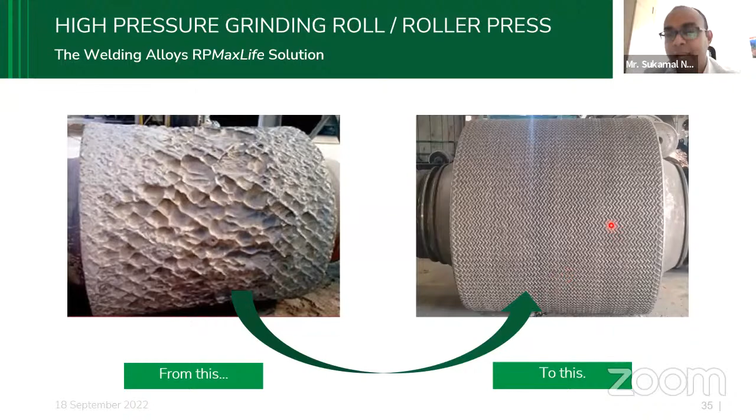This is quite interesting. You can see how this roller looks, and from there, during this COVID period, we just took this from the scrapyard and we rebuilt it, and it actually enhanced the life. As I showed you in the previous slide, around 6,400 hours, it has increased the life here - a tremendous amount of life increase.

So this is basically an in-situ photograph after using it for 20,000 hours, showing how it looks. So we can see that we can use it.

This is very interesting - where it worn out during operation, we took it out, and after using it we first grind it, remove the old layer, then we start depositing, and this is basically how the final component looks.

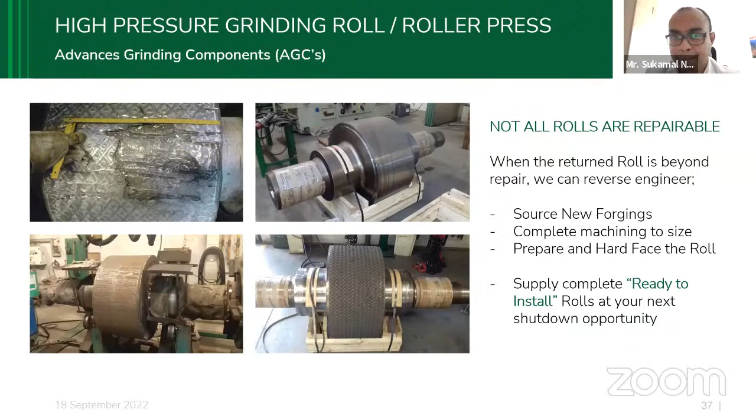This is basically the shell hard facing we are doing here. You can see this is a long torch we use, and then there's a method, and we do basically in-situ repair in the cement plants. Practically, we always get a maximum 7 days shutdown, so we have to finish everything in 7 days. So we can understand how efficiently we have to work.

And for the next 1 year, the cement owners don't want any kind of unwanted stoppage of their production. So this is how it looks after welding, you can see here.

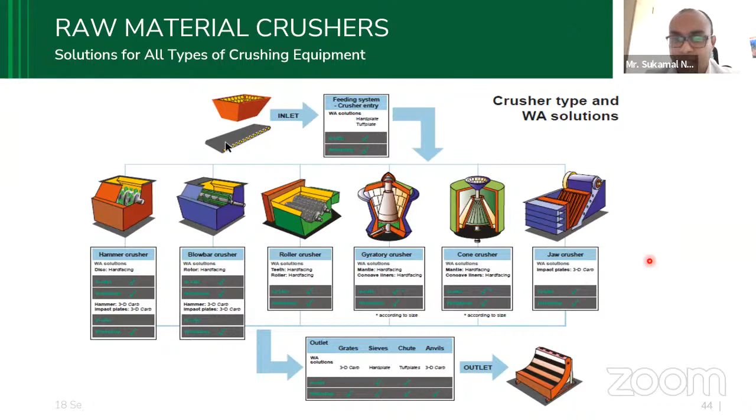Next is basically the raw material crusher. There are different types of crushers out there: hammer crusher, blowbar crusher, roller crusher, cone crusher, jaw crusher, and all these crushers basically crush the raw materials to make cement. This is how it looks - the cone basically gets eroded, and these are the crushers. So we do the hard facing, and then we put it here. This is how it looks basically.

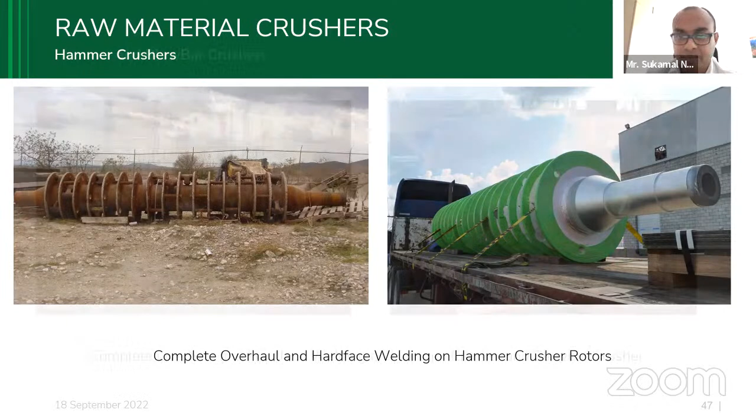Okay, so this is basically how the components look, the blowbar crushers. And this is our 3-D Carb, which is our unique, patented solution. So this is basically the crusher's hammer. We take it back, and then this is the layer we put. You can see that we do not do complete welding in this way; we make small squares and deposit it so that it can enhance the life of the component. This is a trademark product.

So we have the know-how to repair this one; we use Gamma 182, which is basically nickel-based wire, for this kind of repair. As I told you, here we determine what kind of consumables we need and what things we need to take care of.

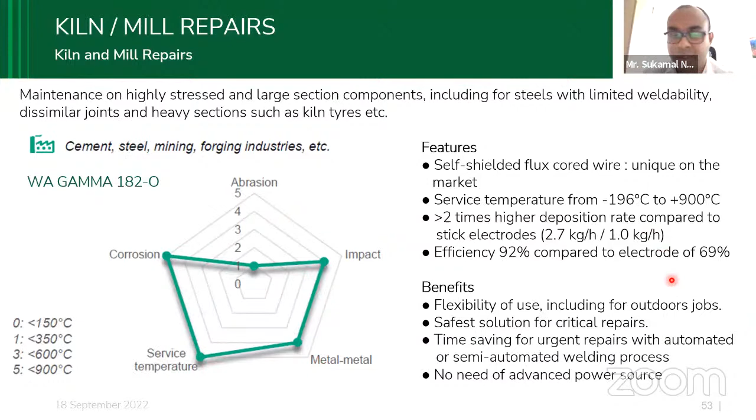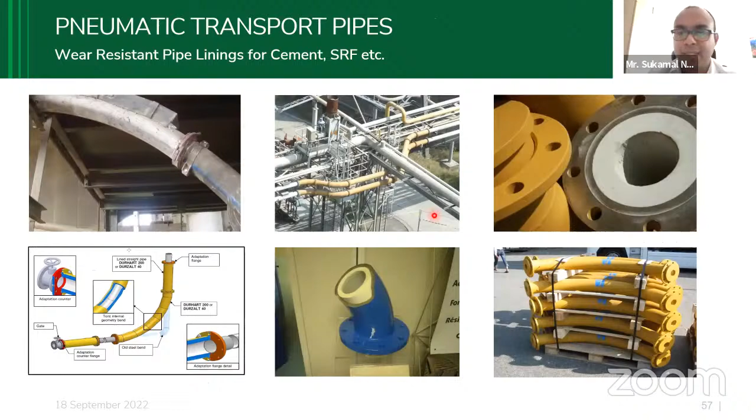Next, pneumatic transport pipes. There are several transport pipes in the cement industry, where because of the cement it gets quite a lot of erosion and corrosion, and then we do a lot of repairs of these components basically.

Depending on the life the customer wants, we recommend several types of products which could enhance the life 6 times, 4 times, even 2 times. And the maximum operating temperature also plays an important role.

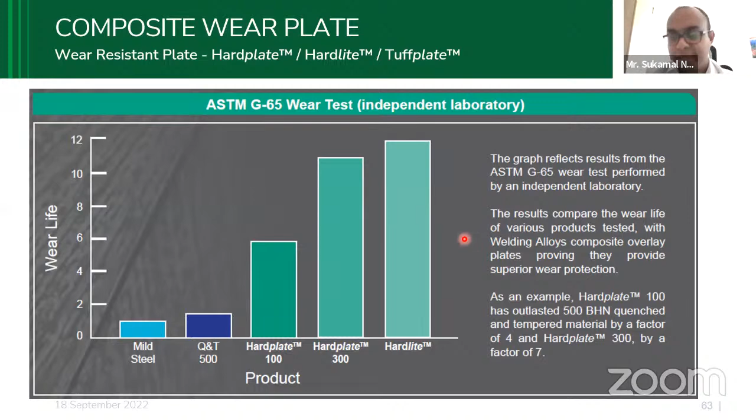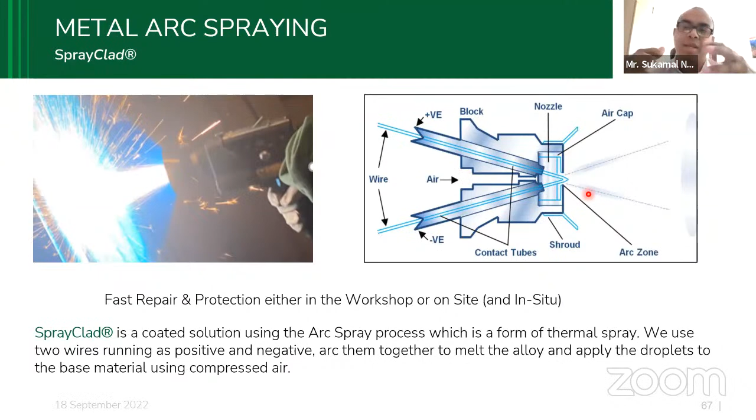The last one is the metal arc spray. This is basically a new development for us. All previous ones I've shown are basically welding or fusion welding, but here is a new technique we are developing, called SprayClad, which is also a registered trademark of ours. It's basically an arc spray process where two different types of wire are melted, and with the force of air, we deposit them on the surface of the component. The beauty is that this SprayClad coating does not affect the base material and forms a mechanical bond with the substrate, with a hardness value between 970 to 2100 HB. We can create immense hardness with a very thin layer. Sometimes the customer doesn't allow deposits of high thickness like 2 or 3 millimeters. If the customer needs it in microns, we use this spray cladding technique, and our goal is to provide a protective barrier for the substrate.